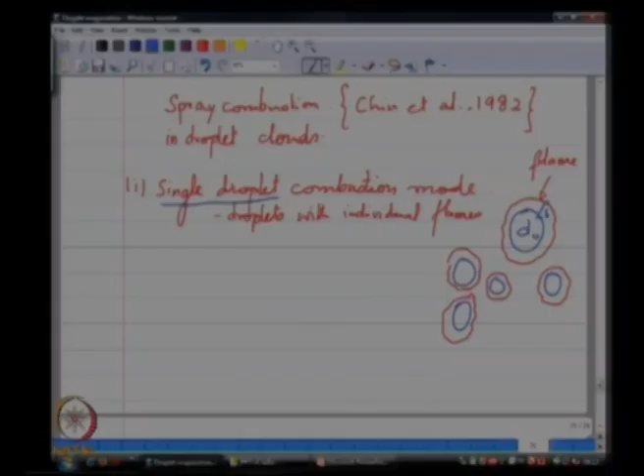So, somewhere in the middle there is a point at which your flame would be sustained, and this flame is essentially transporting heat back to the drop either in the form of radiation or some other process, and that process is further accelerating this vapor release. So, this flame is going to be sustained as long as you have a source of fuel, as long as the fuel is not completely exhausted. The moment the fuel is completely exhausted, we are not going to be able to use this model.

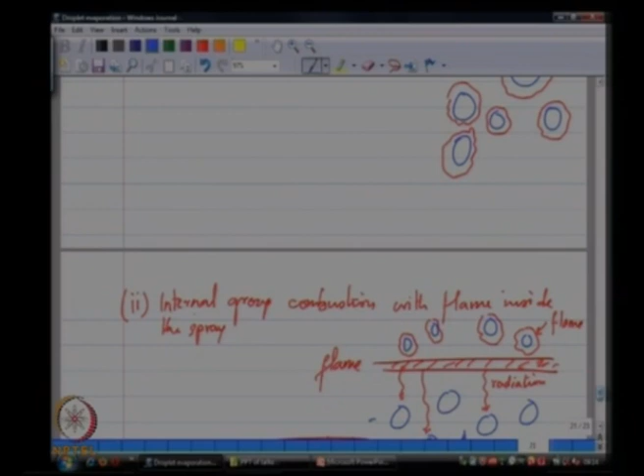Then the next model that we talked about in the context of droplet combustion is internal group combustion, where I have a flame. So, the flame is given by this red hashed line. I have drops that are generated from some nozzle, and this nozzle is essentially producing a polydisperse spray. So, I have all the drops that are being transported towards the flame at some velocity u, and these transported droplets are coming into the flame zone, receiving heat from the hot gases that comprise the flame zone and releasing vapor.

But let us take a very simple situation where if this process was such that the time scale associated with the droplets coming into the flame zone is fast in comparison to the rate of transport of heat to the droplets, it is conceivable that the droplets would not be completely evaporated. When the droplets are not completely evaporated, you have a flame sustained by whatever vapor is released from the droplets, but you still have an intact, although small, liquid droplet that escapes the flame zone.

So, now if I continue this time scale analysis, although we are not doing it in a very rigorous sense, if the droplet number density, which is based on the spacing between the droplets, the ratio of the spacing between the droplets and the length scale over which the concentration gradient happens in the ambient atmosphere, if that is too high, then you actually have a region which is indicated by this green hashed zone where there is no evaporation possible. So, essentially the evaporation process is completely suppressed.

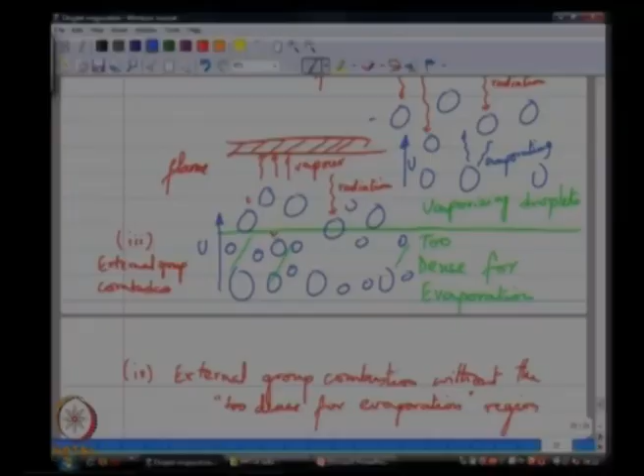And so, we are not really looking at a green line in a spray below which there is no evaporation and above which there is evaporation; it is sort of a schematic for us to understand how this process happens. So, you could have a region very close to the nozzle where the droplet number density is so high that the ambient interstitial air is completely saturated at that given temperature, and heat is not being transported to that zone, because let us say radiation is obscured by the drops that are in between the flame and this dense spray region, or through some other process. Essentially you have a region where there is almost no evaporation, followed by a spatial region where you do have droplets evaporating and supplying fuel to the flame.

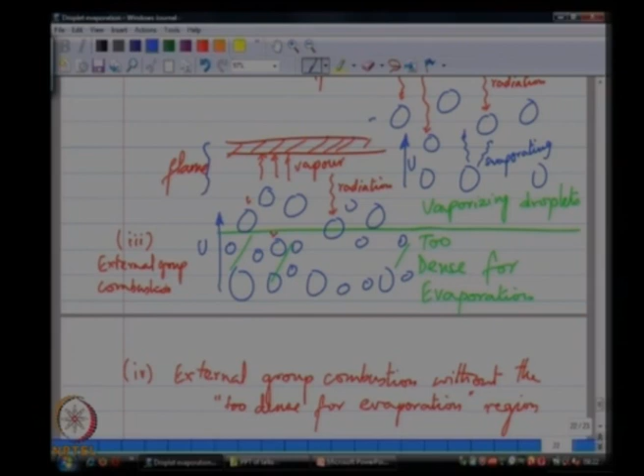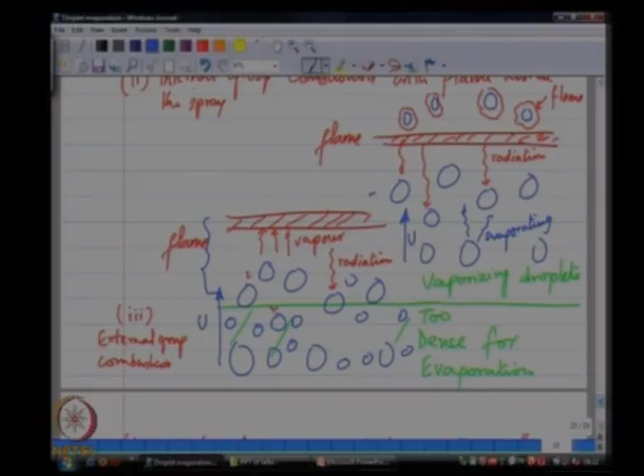So, this part is like our internal group combustion, except that the flame is now completely supplied only by vapor. So, you do not have any droplets reaching the flame at all. The only source of energy to the flame zone is vapor fuel alone.

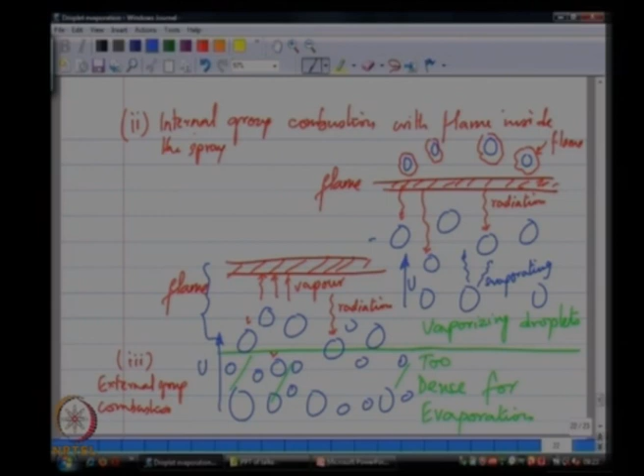So, this would be the primary desirable mode of combustion in most applications, because every time you have a burning droplet escape the flame zone, that could become a source of soot, because you cannot ensure well mixedness, you cannot ensure the appropriate equivalence ratio in situations where individual droplets are burning. Whereas, if I ensure homogeneous vapor phase reaction, then your desired stoichiometry is better controlled and achievable.

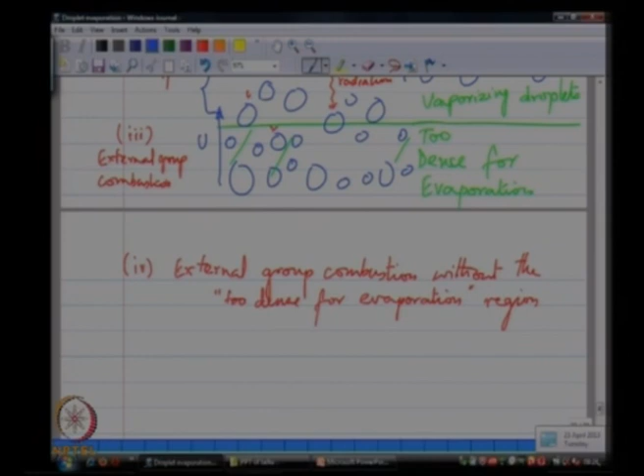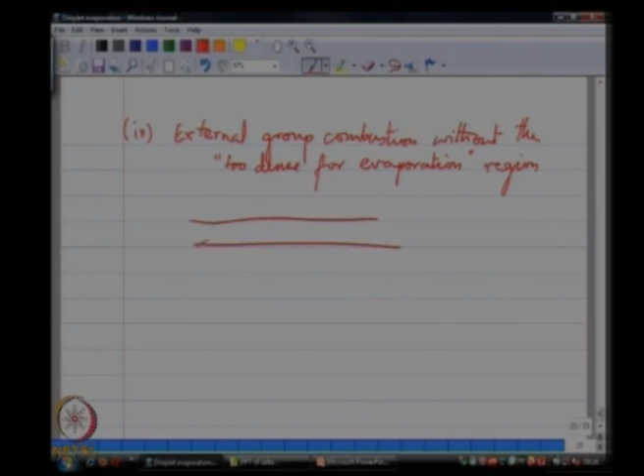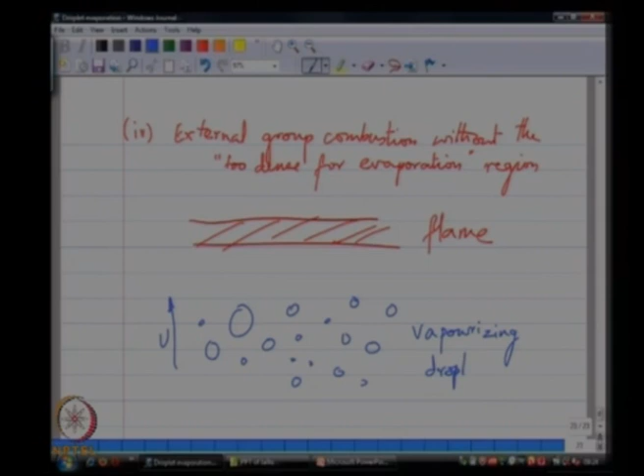The last possibility is external group combustion without the too dense for evaporation region. So, essentially it is very similar to the last example we saw, that I will have a flame zone with droplets that are being transported towards the flame, but all the droplets are vaporizing, and the droplets themselves are completely evaporated prior to the flame zone.

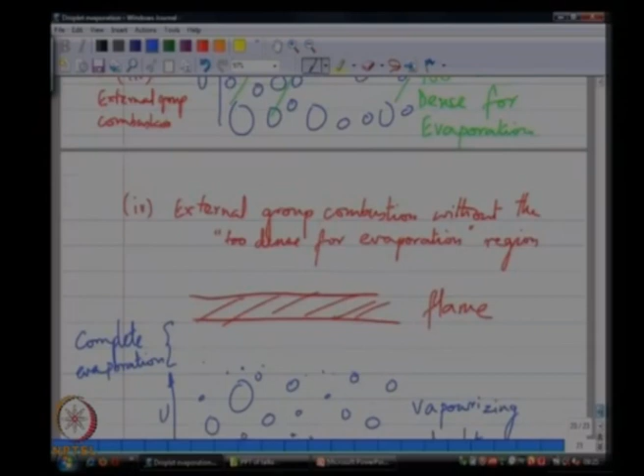This is our fourth mode of combustion. So, this is also in fact a very desirable regime of operation, primarily because your flame is entirely sustained by a homogeneous mixture of vapor and air. So, you are more likely to eliminate rich and lean spots, or you are more likely to eliminate spatial fluctuations in the equivalence ratio.

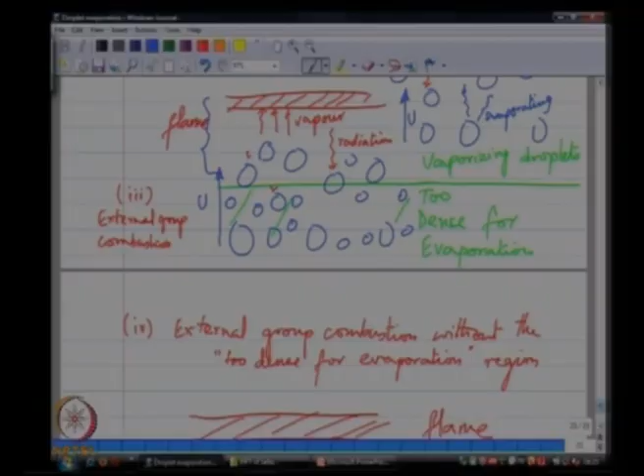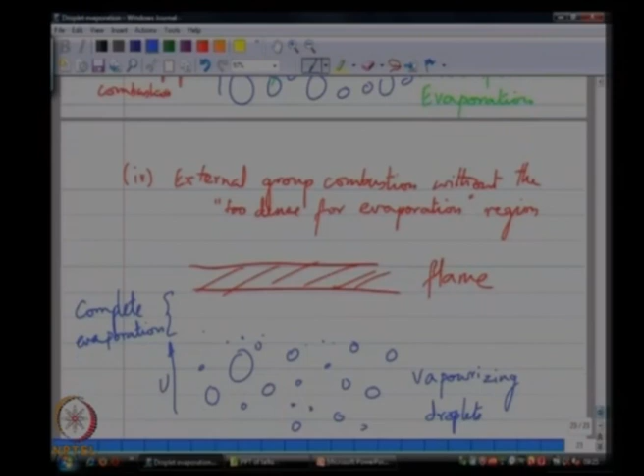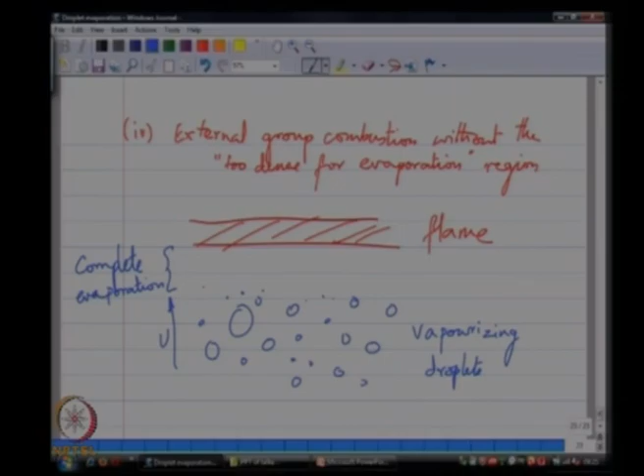So, you have the third and the fourth modes that are very similar, but are only distinguishable by the number density of the droplets. So, in the number 3 mode, if the droplet number density was a little low, then the situation would look like number 4, where you have external group combustion without the too dense for evaporation region. So, essentially you would have heat being transported all the way to the nozzle, which creates a spray that is evaporating right from the outset.

Okay. Now, whether you have number 3 or 4 is usually not in our control, primarily because the droplet number density is determined by the flow rates that you may require and the atomization characteristics of the nozzle itself. So, if I desire a certain heating power from my spray combustor, that also determines the liquid fuel flow rate, which in turn determines the droplet number density.

So, if my power requirement is low, then I may have a low number density, creating a vaporizing droplet stream right from the nozzle outlet itself. Whereas the power density, which is sort of the power expected per unit volume of the combustor itself, has a role to play in whether you are operating in regime number 3 or regime number 4.

So, these are still schematics of what happens when I have a cloud of droplets that are feeding fuel vapor into a flame zone. Now, the flame itself is trying to burn back towards the nozzle, and this fuel supply towards the flame is what is stabilizing the flame in a zone that is far away from the nozzle itself. So, very close to the nozzle, I may not have enough fuel vapor supply to sustain a flame, and the flame is therefore stabilized in a general spatial region where the equivalence ratios are appropriate for combustion to happen.

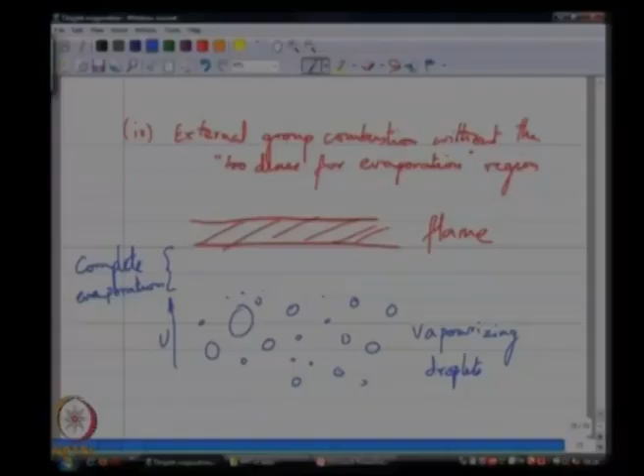Secondly, in the case of liquid fuel flames, almost always the flame itself is non-premixed, that is, your oxidizer source and the fuel source are spatially separated, and so they would have to mix. So, like I described in the schematic in the last class, there are three possibilities. So, I have the case of combustion of single droplets, or I can now extend this to combustion of a cloud of droplets.

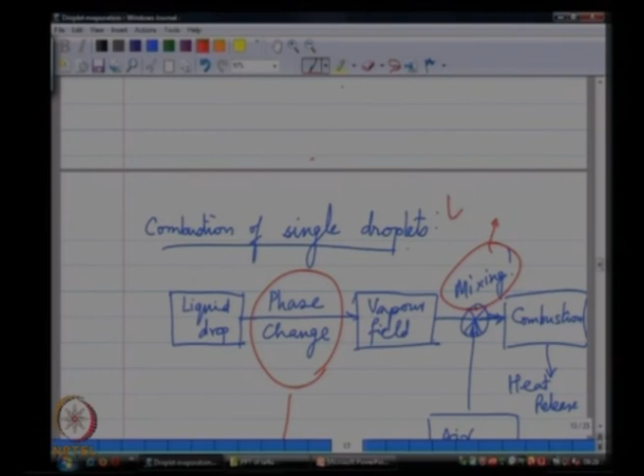I have a liquid droplet cloud that has to undergo some kind of a phase change process to give me a vapor field. That is, I have a distribution of vapor concentration in a certain spatial region. That vapor generated from the evaporation process has to now mix with the air around, and this mixing process creates an equivalence ratio field. This equivalence ratio field is essentially now limited by the rate of mixing.

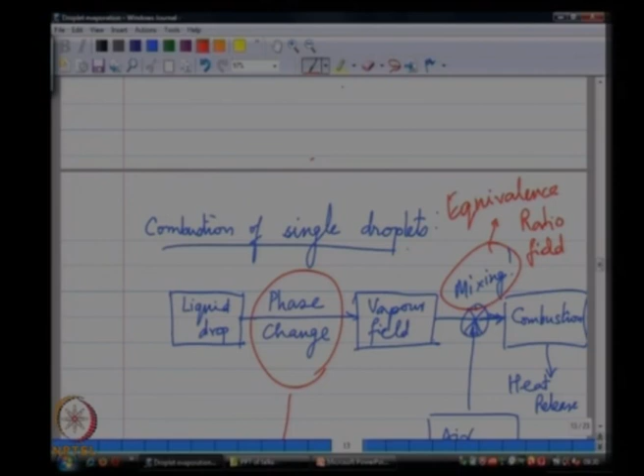I have a source of vapor, which is my cloud of liquid droplets. The oxidizer source is spatially separated. So, in let us say a swirl stabilized burner, I may have the air coming through some kind of a swirler, and that air from the swirler would have to now mix with the vapor generated from the droplet stream, and that in turn has to give me an equivalence ratio field that would then undergo reaction, which we call combustion,

and releases heat. So, this process of phase change, we said it is diffusion limited, that is, essentially the rate of transport of the vapor away from this cloud of droplets. Even if I was able to do that, the next limiting step is mixing, the rate at which oxidizer and the vapor can be mixed. In relation to these two time scales, the rate of reaction itself is so fast that you can assume that as soon as they become mixed, they burn. If my rate of evaporation is poor or if my mixing is non-homogeneous, then I am likely to create fluctuations in equivalence ratio.

So, I am likely to create rich and lean spots in the spatial region, and this generally is not desirable, because the rich spots are nucleation regions for soot, and the lean spots are going to be hotter. We are not talking very lean, but leaner than, let us say, equivalence ratio 1 are generally regions where you are likely to create NOx, nitrogen oxides.

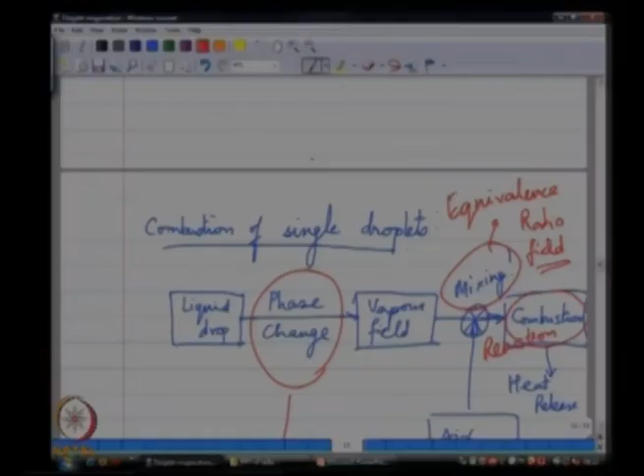The whole process of heat release from spray to reaction is limited by the slowest of these three steps, which is usually never the reaction process; it is either the mixing process or the rate of evaporation process. So, one of these two determines the rate of heat release in a typical spray combustion application. Okay.

So, we talked a little bit about spray combustion, starting with spray formation, which is essentially the process by which bulk liquid is broken up into blobs of liquid, large or small, it does not matter, and is governed by the growth of some kind of instabilities on the bulk liquid that is emanating from a nozzle. The process by which these liquid drops might further break down is what we called secondary atomization.

So, you have flow inside the nozzle, followed by primary atomization, followed by secondary atomization, which is then followed by evaporation, which is then followed by mixing, where the vapor is mixed with the oxidizer stream, and then your reaction. Now, I said followed by and followed by, but that does not denote that they are spatially separate or that they are temporally separate.